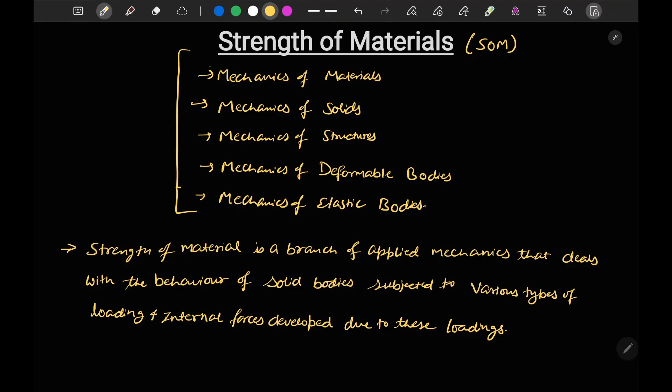Now, in the title it is also known as mechanics of deformable bodies and elastic bodies. Let's talk about deformable bodies, but before that let's first talk about rigid bodies. In case of rigid bodies, there is no change in dimensions of the body under external load. Stress may be developed, but there won't be any change in the dimension of the body for a rigid body.

Now if we talk about deformable bodies, under the application of load, the solid's dimension changes. This dimension change, this deformation, may be elastic deformation, and next it may be plastic deformation.

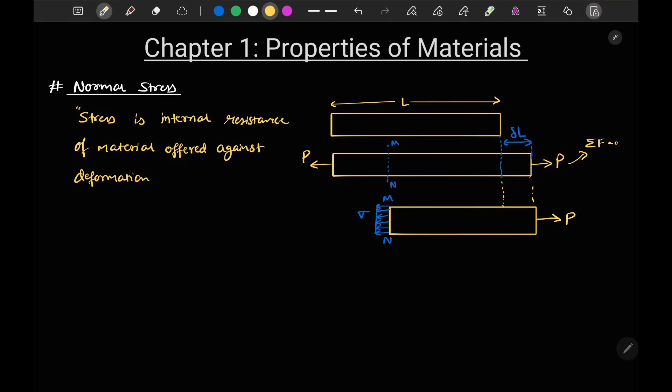Stress is internal resistance of material offered against deformation, which is force per unit area. Okay, so our stress is an internal resistance of material offered against deformation, which is force per unit area.

So stress is internal resistance. This stress will be induced only when there is presence of internal resistance. And when will this internal resistance be present? When the material is undergoing a deformation. So if there is no deformation, there won't be any internal resistance, so stress will be 0. I hope you understood this point.

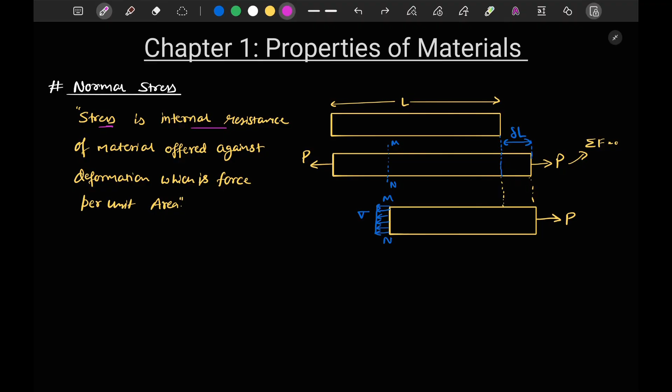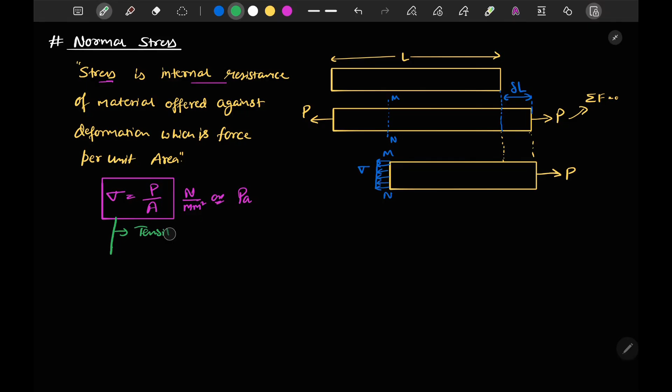This stress is force per unit area, so we can write sigma is equal to P upon A, and it has the unit of Newton per mm square or Pascal. Now this stress may be tensile or compressive. Tensile stress is represented by a positive sign, and compressive stress is denoted by a negative sign. So this is the sign convention.

I hope you know what tensile stress and compressive stress are. If you don't, let me mention it here. If a body undergoes deformation and the distance between particles increases, it is tensile. If the distance between particles decreases, it is compressive stress. Tensile stress is shown away from the cross section, and compression is shown towards the surface.

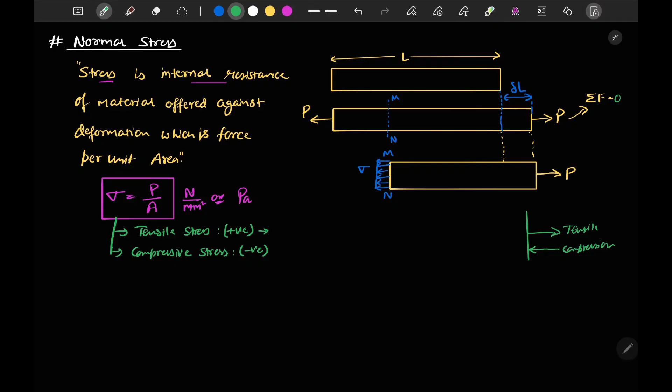And one more thing, let me mention it here. Stress will only be induced when there is a restriction in the motion. Like here, we have seen that this bar initially was restricted, so there won't be motion from the left side or right side. So if we cut it here and imagine an imaginary cross section,

if you see this part only, there is a force P. Due to force P, this material should move in the forward direction. But since this material is stationary, there must be some internal resistance or internal force acting on this material to keep it at rest. This internal resistance is called stress, that is, normal stress.

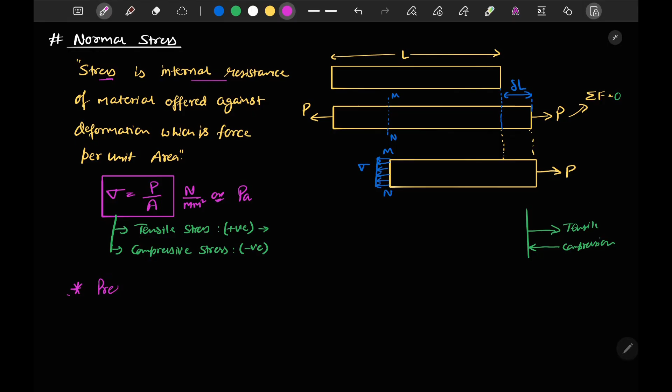Now, if we talk about pressure, let me mention a point here. Pressure has the same unit as stress, but is a different physical quantity.

And one more thing, if we have defined stress as internal resistance, then pressure is an external normal force distributed over a surface.

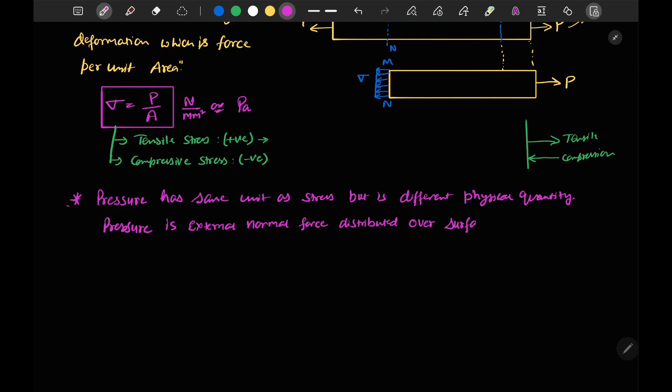So stress is the internal resistance and pressure is the external normal force. So this is the difference between stress and pressure. Now previously I mentioned that due to the presence of deformation in the body, the dimension of the body changes. So dimension changes, and the area of cross section also changes. So on the basis of the area of cross section considered during calculation, we have defined stress in two parts.

First one is engineering stress. Second one is true stress. Now this engineering stress is also known as nominal stress, and this true stress is known as actual stress. Now if I talk about the engineering stress, we can define sigma is equal to P upon A naught, and this A naught is the original cross section area of the specimen.

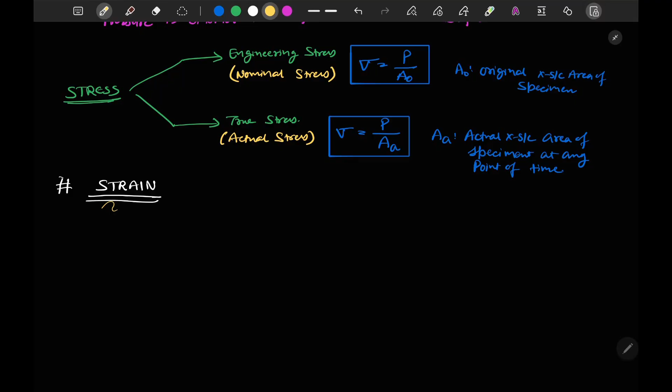Next we will be moving to the topic strain. So if we look into the definition of strain, elongation or shortening of a member under axial load per unit length is known as strain. And strain is represented by the symbol epsilon.

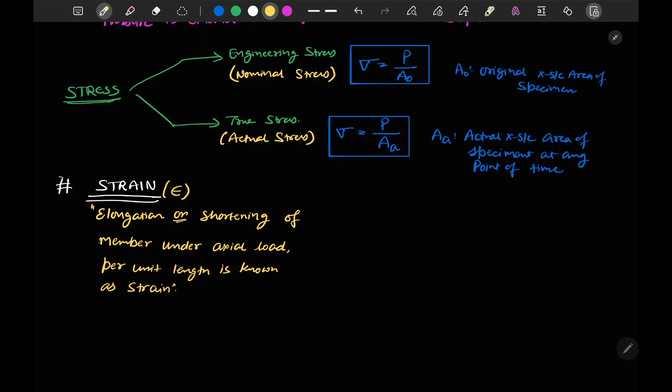So let me draw a diagram showing the strain here. Let's consider a bar attached to a rigid support. Let me copy and then paste. Under the action of external force P, the member elongates, and the elongation amount is delta L. And the original length of the member was L.

So from here we can define strain epsilon as delta L, change in length, elongation or shortening, divided by original length, that is per unit length, L. So this is our strain. Now this strain is a dimensionless quantity, because both numerator and denominator are in meters or in mm.

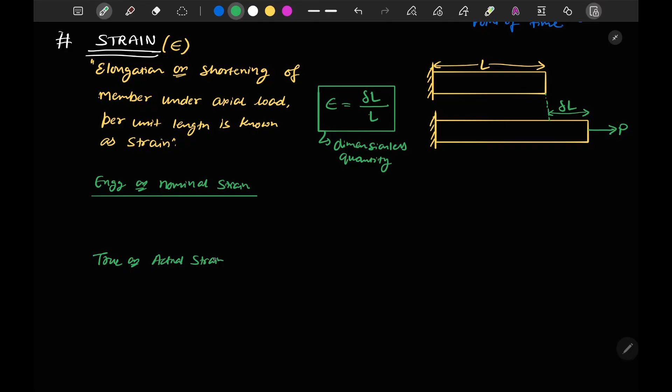Now similar to the case of stress, there can be tensile strain and compressive strain. And similarly strain is also written in the form of engineering or nominal strain, and true or actual strain. Now if I write the formula for both cases, similar to stress, engineering or nominal strain can be written as delta L upon L naught, and here L naught is the original length.

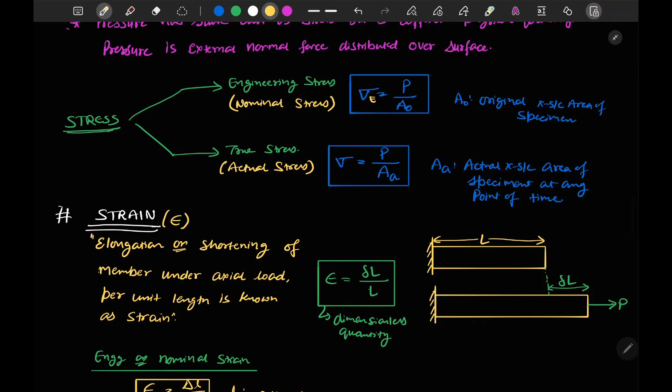If I talk about actual strain, engineering strain is written as epsilon E, and true strain is epsilon T. And similarly engineering stress is given as sigma E, and true stress is sigma T. True strain is delta L upon L_A. Now this L_A is the actual length of the member.

Now let's discuss the relationship between engineering and actual stress. We can write actual stress or true stress is equal to engineering stress or nominal stress times 1 plus or minus engineering strain. We use plus in case of tensile load and negative in case of compression.

Similarly, true strain can be written in terms of engineering strain as ln of 1 plus epsilon, and we can also write it in terms of length and area. We will see this explanation in theory of plasticity when we study production. So here let's stay with this.

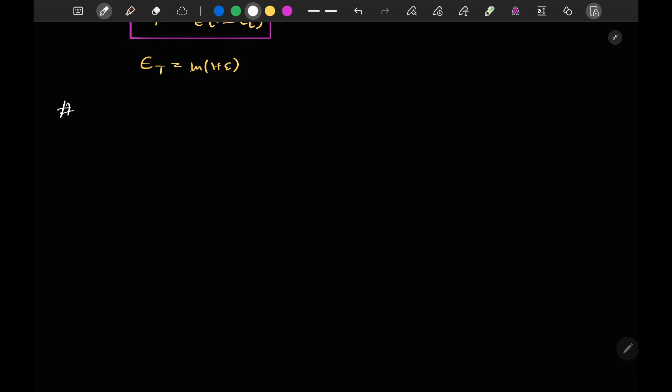So we have discussed stress and strain in strength of materials. Now we will see how different materials behave under tension test and compression test. But before discussing that, let's first discuss different types of materials, or let me write it directly as homogeneous and isotropic materials. So if we want to discuss homogeneous and isotropic material, wait a minute.

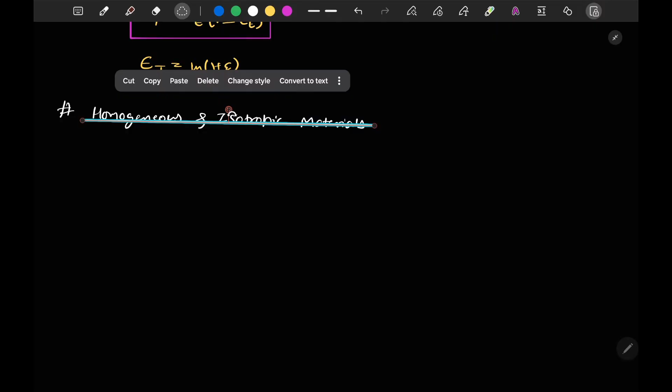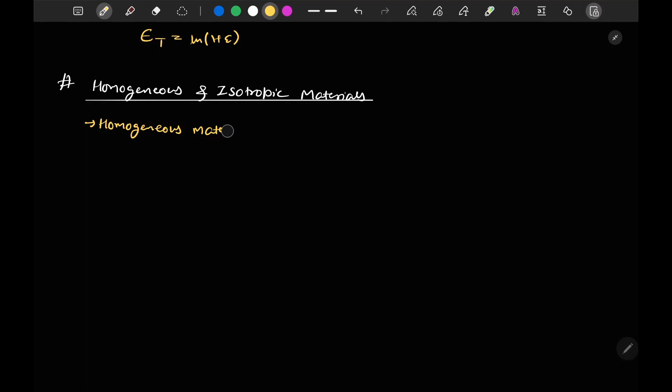So if I talk about homogeneous and isotropic material, first let me mention what is a homogeneous material. So homogeneous materials exhibit same elastic properties at any point in a given direction. Okay.

Now if we talk about isotropic, so isotropic materials exhibit same elastic property or properties in any given direction. Any direction, like it was at any point in a given direction. Here it is any direction at a given point.

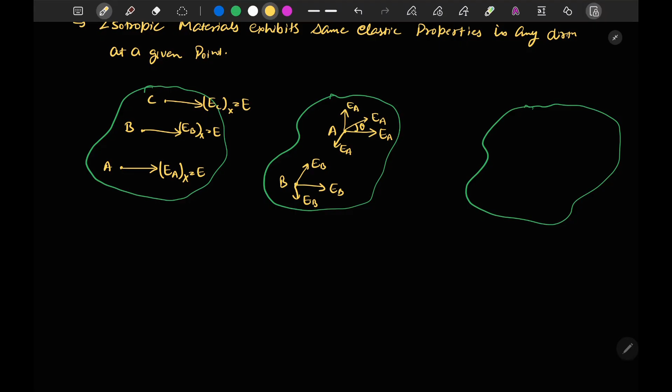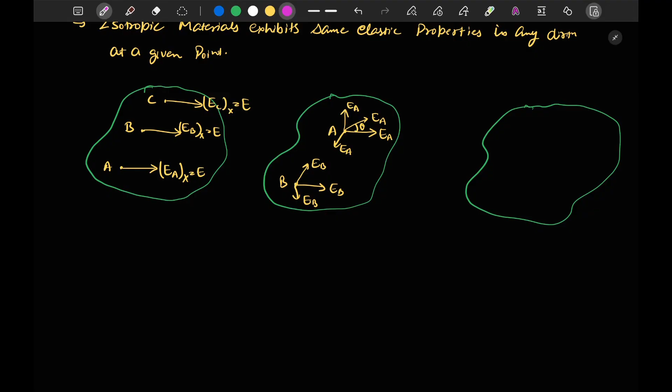So this type of material, where in a particular direction at any point we have the same value of elastic properties, is called homogeneous. And this is called isotropic. Let me mention something here. So homogeneous is any point in a given direction, and isotropic is at a given point in any direction.

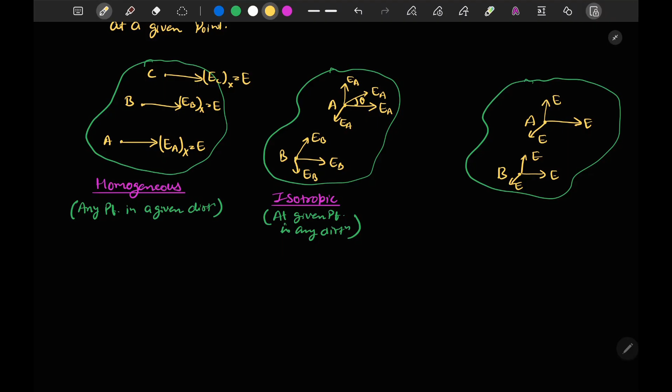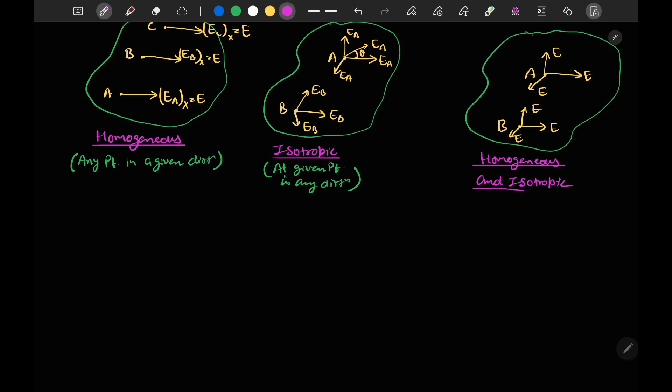Now there might be a third case where, whether it is point A or point B, your E remains the same throughout in any direction. E, similarly E. So such materials, in which the property remains the same throughout your system, are called homogeneous and isotropic.

Now we will see the stress strain diagram for mild steel under tension. So let me put the heading here: tensile stress strain diagram for mild steel. In case of mild steel under tension, what will the behavior of the material be, we will see it here. So let me plot it. Let's say this is our stress axis, and stress is our engineering stress. Similarly this is our strain axis, and the strain is also our engineering strain.

Or let's write it epsilon E. Stress and strain. So if we draw it for mild steel, mild steel is a ductile material, so generally all ductile materials follow it in a similar way. Let me draw it here. For a small part it is a straight line. And after this point there is a non-linear region, something like this.

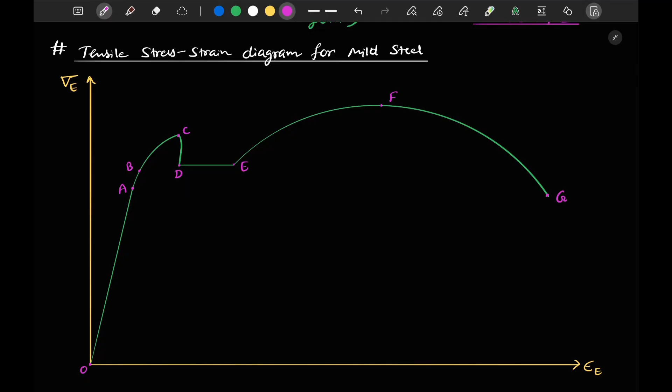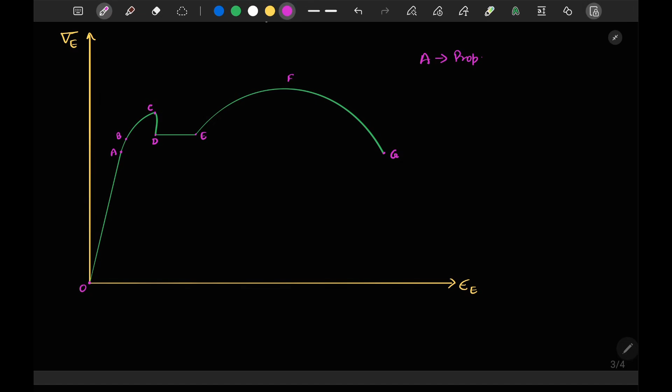Now in this stress strain curve, if I want to name the points, the point A corresponds to our proportional limit. So up to this proportional limit, it follows stress is proportional to strain. Okay, curve AB is non-linear. Only O to A is linear; A to B is non-linear.

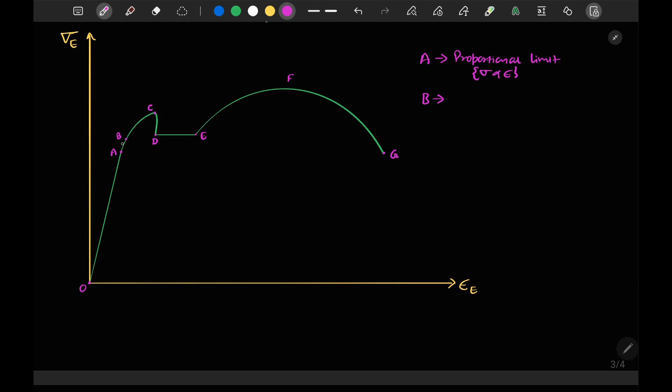So point B represents the elastic limit. Up to this elastic limit, our material will regain its original shape and size. If I talk about point C, this point C is the upper yield limit. After upper yield, the point D will represent our lower yield limit, lower yield point or yield limit.

Now let's call these the proportional point, the elastic limit, the upper yield point and the lower yield point. In terms of significance, the upper yield point doesn't have much significance in our further studies. In all future studies we refer to the lower yield point, and this lower yield point is our actual yield point.

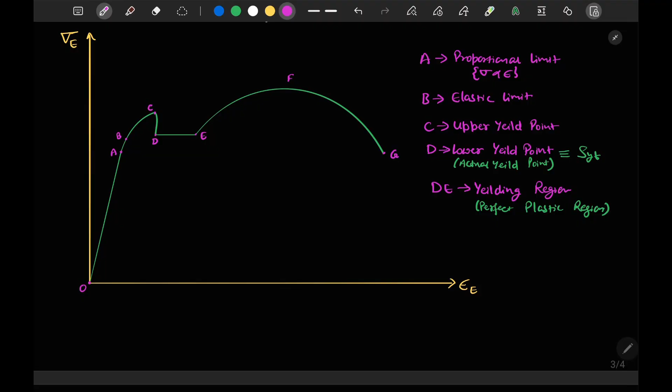Now if I talk about region EF, this is point F, our peak point here. Region EF indicates our strain hardening region. This point F is known as our ultimate point.

And the stress corresponding to this point is known as the ultimate tensile stress, SUT, also written as sigma UT. Now the next region, F to G, is known as the necking region, also called the strain softening region.

And finally point G is called our breaking point or fracture point. So this is our stress strain diagram for mild steel under tensile stress.

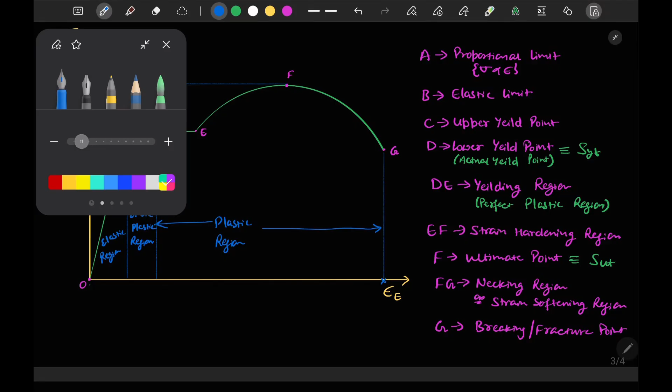So this is our proportional limit, elastic limit, lower yield point or SYT. This is our ultimate point, or SUT. So these are the main points of the tensile stress strain diagram for mild steel.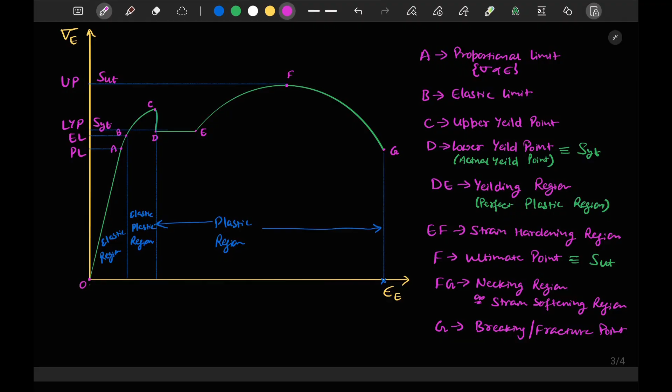Now there is one more thing. Let's say this is for our engineering stress and strain. If it was our true stress and strain, the true stress and strain curve would have gone like this. Let me draw it with another color. It follows O, A, B, C, and after C it will move something like this. Now this graph here will be known as our epsilon t and sigma t curve. I hope you understand it till here.

Now we will move to the next part, that is our compression curve. If we look into the compression curve for mild steel, let me draw the stress strain axis. This is sigma, engineering stress, and here it is strain, that is epsilon. Let's write sigma and epsilon only. If I talk about engineering stress strain, it should be like this. At some yield point it will remain constant, sigma y.

Now at this point the stress is increasing, something like this. But in case of your actual curve, the actual curve should follow something like this. So this is our actual curve and this is our engineering curve. So this is the compression curve for mild steel, MS.

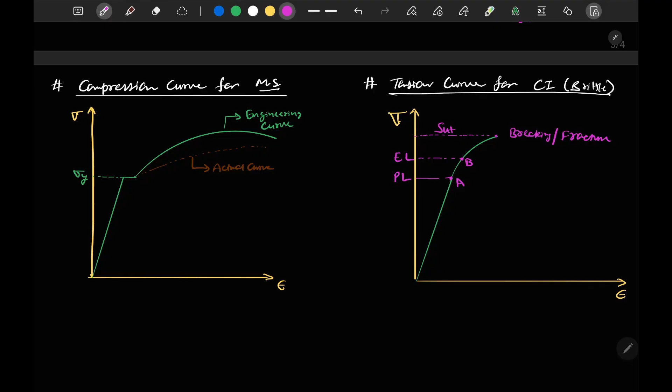Now we will move to properties of metals. The first property we are talking about is ductility. So what does ductility define? Ductility is the property by which material can be stretched. The larger the deformation, the larger the value of ductility. It is also termed as the ability of the material to be drawn into wire.

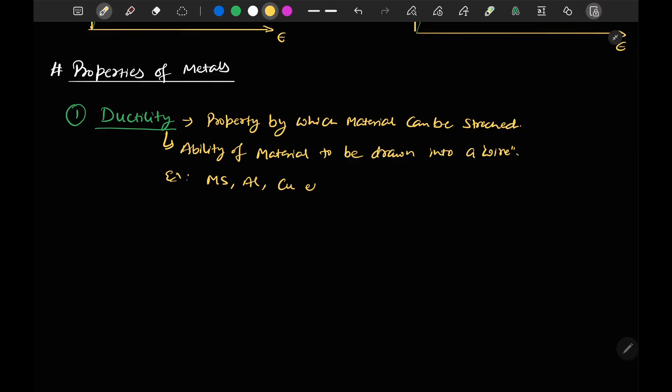So this is the ability of material to be drawn into a wire. The longer the wire that can be stretched for the given material, the higher the ductility of that material. Examples of ductile materials are mild steel, aluminum, copper, and we can also include brass and bronze. We can talk about nickel in this. These are all examples of ductile materials.

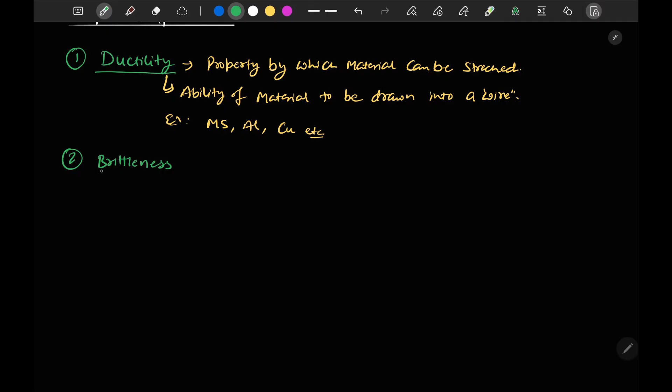The second property is brittleness. Brittleness is the lack of ductility, that is, the material cannot be stretched. The examples are cast iron, concrete and glass.

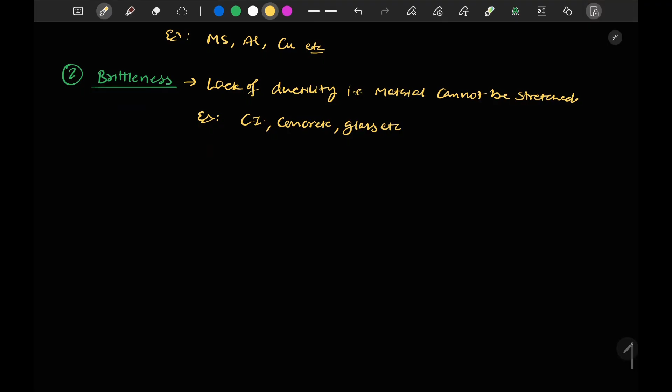Now the third property is malleability. So what is malleability? Malleability is the property of metal due to which metal can be converted into thin sheets by pressing it. A malleable material possesses a high degree of plasticity. This property of malleability is used in forging, hot rolling and stamping processes. These processes consider the malleability of the material.

The fourth property we talk about is hardness. Hardness is basically resistance to scratch or abrasion, abrasion with a single S. Of course there are some methods of measuring hardness; we will study them in your material science subject. Now the next property is creep.

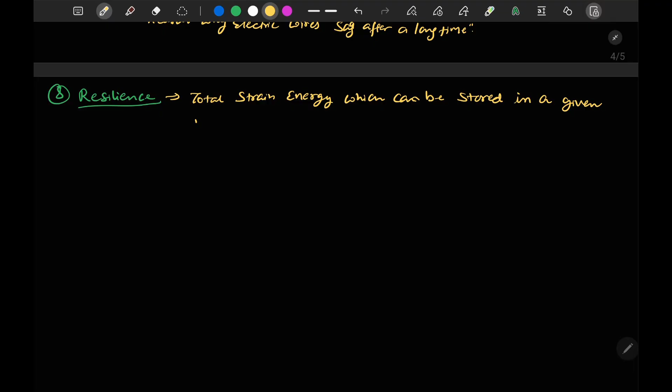Next, let's talk about 8, that is resilience. So if we talk about resilience, it is the total strain energy which can be stored in a given volume of metal and can be released after unloading.

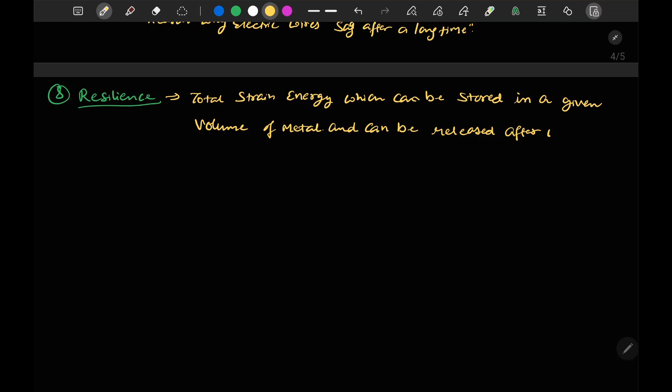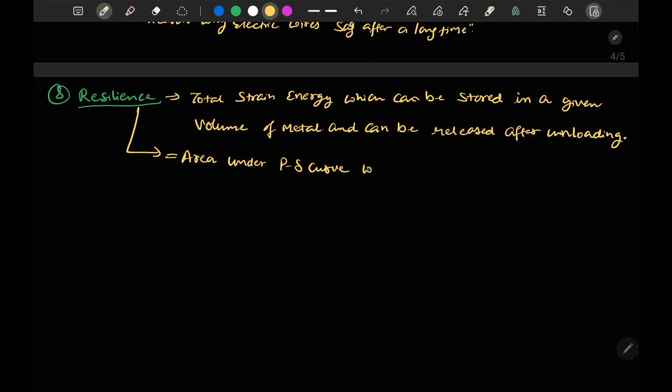This is called resilience. Okay, so this resilience is equal to the area under the load deflection curve up to within the elastic limit. Okay, within the elastic limit. Okay, now similar to resilience, we have a term modulus of resilience.

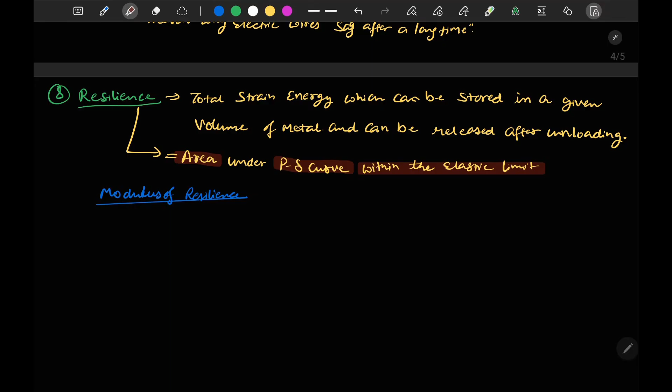So if we talk about modulus of resilience. Okay, when we talked about resilience, we talked about the area under the P delta curve within the elastic limit. Okay, now let's talk about modulus of resilience. In case of modulus of resilience, I say that it is the area under the P delta curve up to elastic limit, per unit volume.

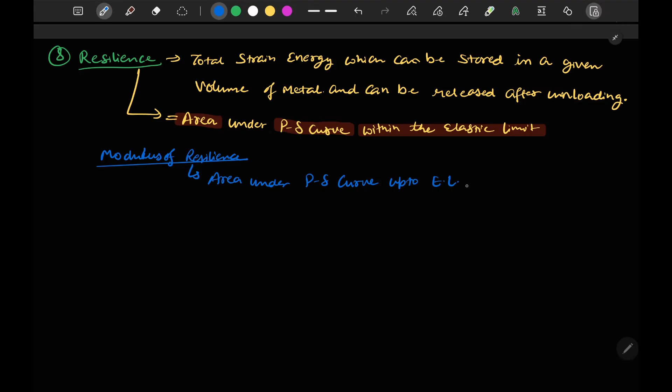And it can be also defined as maximum elastic energy per unit volume. Okay, so this is called our modulus of resilience. Okay, now this modulus of resilience is denoted by UR, and UR can be written as half times sigma y, the yield strength, into strain up to yield point.

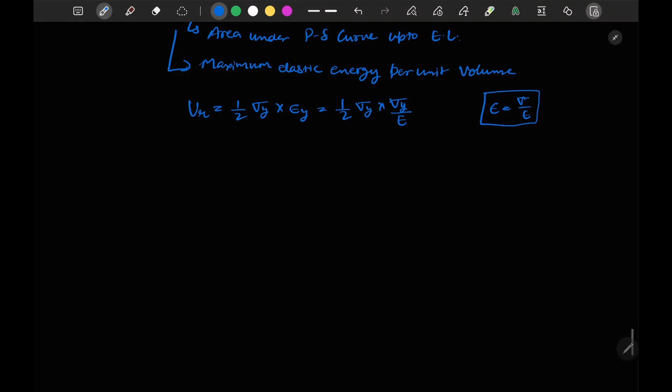Okay, and it can be also written as half into sigma y into, now this strain can be written as stress upon Young's modulus. Our epsilon y is given by sigma y by E, or we can write epsilon is equal to sigma by Young's modulus. We will see this formula in our Hooke's law, when we study Hooke's law. Okay, so from here we can say that modulus of resilience UR can be written as sigma y square by 2E.

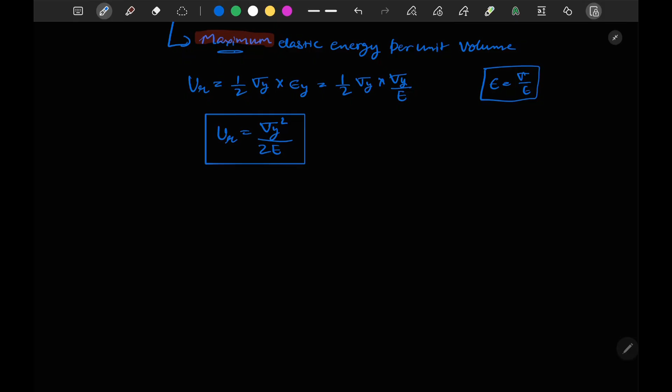Okay, so this UR, modulus of resilience, is the maximum elastic energy. Okay, so since we have said that maximum elastic energy per unit volume is the modulus of resilience, from this we can add a point: higher resilience is desirable in suspension, springs, etc.

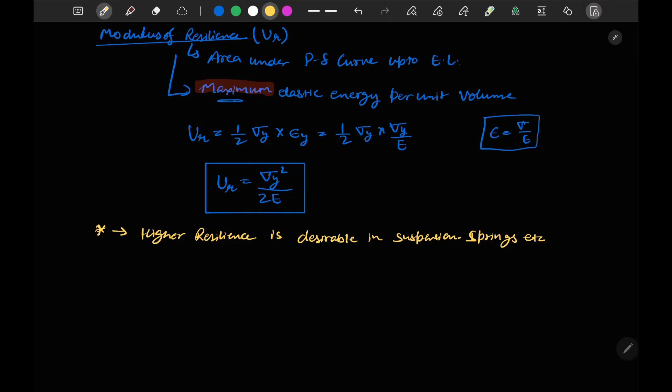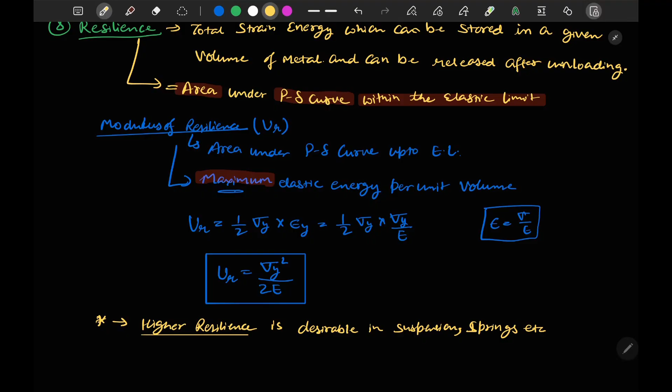Okay, so wherever shock absorption or load absorption is required, at that point we require higher resilience. Why? Because it is maximum energy per unit volume, so how much energy the material can absorb. So in those cases we require the maximum amount of energy that the material can absorb.

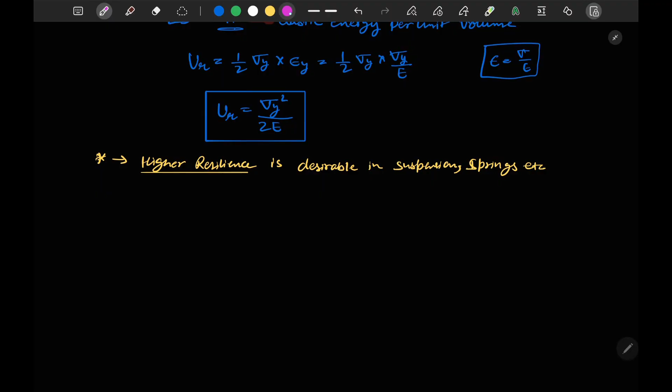Now there is one more term, that is proof stress. I have defined modulus of resilience here. Okay, now let's say I would like to define your, or I can use some other color.

Okay, so let's define proof stress. Proof stress: if I talk about proof stress, in ductile metals, like your aluminum, copper, and let's say silver, these materials do not show clear yield points. So in such metals, of course we are talking about the tension test.

Okay, so we cannot determine the value of your yield strength. So in such cases what we do, we draw an offset line with the 0.2% offset. So let me draw a stress-strain curve here. So this is our stress, this is our strain. Okay, now generally for ductile materials we get it like this. So the curve looks somewhat like this. Okay, sorry about that.

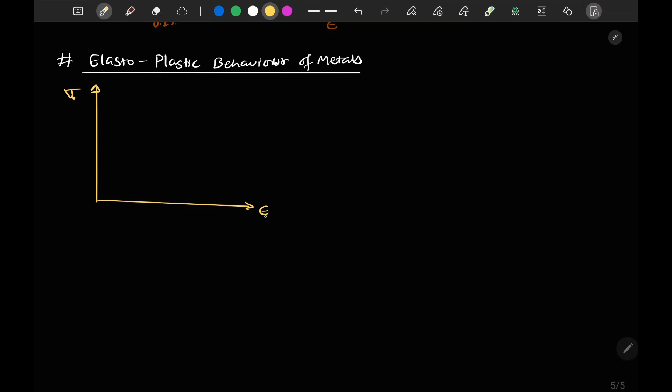Okay, so moving to the next topic, that is elastic and plastic behavior of metals, or elastoplastic behavior of metals. Okay, so let's consider a stress-strain diagram here. So let's say that this is the stress sigma, and here it is our strain epsilon. We have drawn this curve. Let's say this curve represents our loading. Okay, so this was our point O.

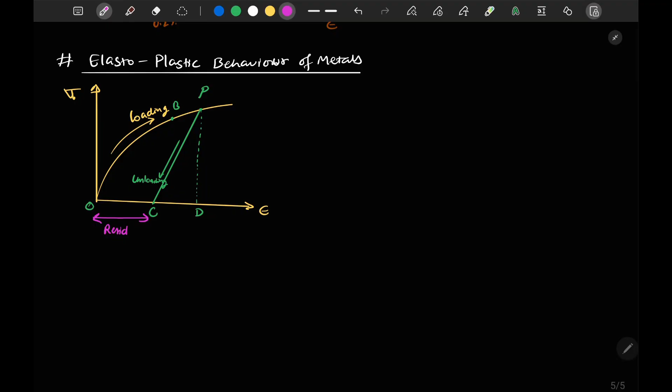Let's say that this is our point B, that is our elastic limit. And after point B, at some point, let's say P, we reach the point P and we try to unload, so this will represent our unloading. So at point P, OD is our strain, but in actuality it is only reduced to OC. So this strain is called our residual strain, and this is called our elastic recovery.

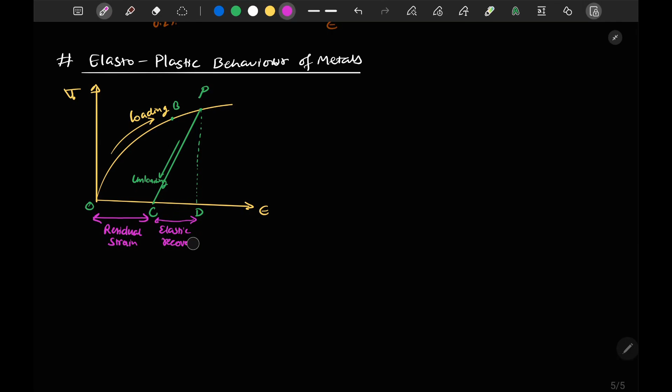Okay, now let's say that at this point we have again started to load this material. So from C to P we will move to loading. So this will again move like this. So this will be our point B, elastic region up to point B now. So from here we can say that reloading of material raises its yield stress. So if we reload the material, then the yield stress of material will increase.

So say if we go again and again beyond the elastic limit, and the material undergoes continuous cycles of loading and unloading, then the yield strength or yield limit of the material will keep on continuously increasing. So this concept is used in the case of cold working, and we will study this in production.

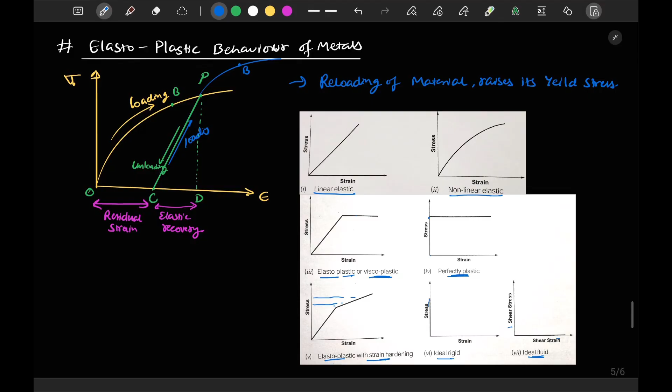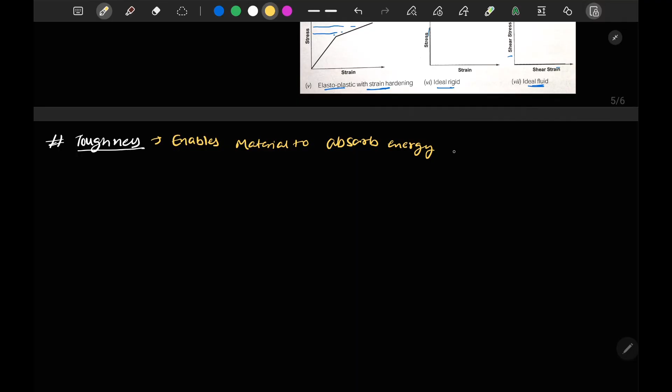So with this we have completed this topic, elastoplastic behavior of metals. Next we move to the next topic, that is toughness. So what does toughness represent? Toughness is a property which enables a material to absorb energy without fracture. So a material absorbs energy, but it does not fracture after absorbing that amount of energy, okay.

This property is desirable in conditions of cyclic loading or shock loading. If a material can absorb a large amount of strain energy before fracture, the material will have more toughness. Similar to resilience, it is the area under the P-delta curve within the plastic limit, okay.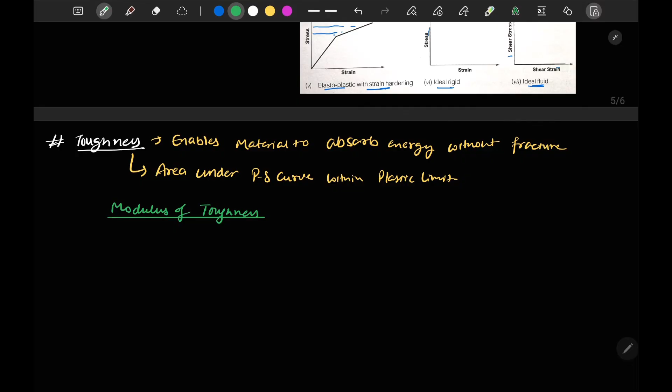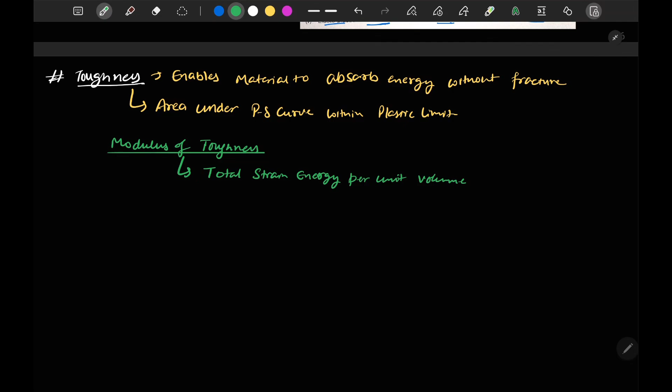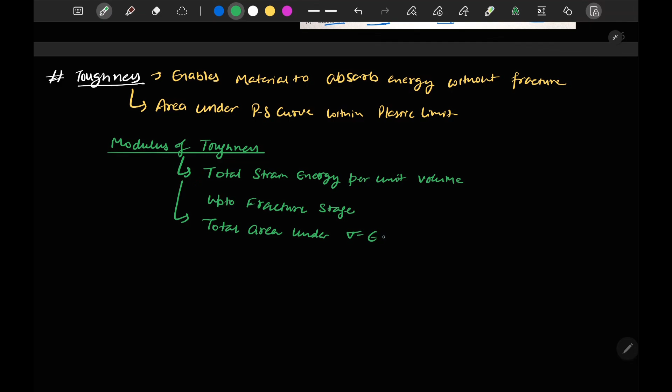Now there is a term called modulus of toughness. Modulus of toughness is defined as the total strain energy per unit volume up to the fracture stage. So this is basically the total area under the stress-strain curve.

So modulus of toughness MT is given as (sigma y plus sigma u) by 2, which is our mean or average stress, into the strain at fracture. So this is our formula for modulus of toughness. Here it is sigma yt and sigma ut, yield tensile strength and ultimate tensile strength. If we talk about compressive, then it will be in terms of C. That's why I wrote sigma y and sigma u.

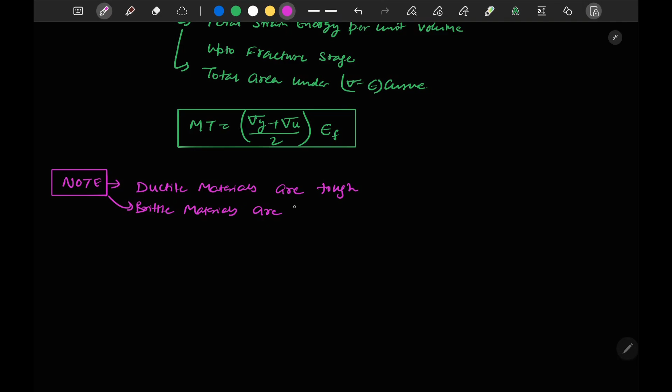So from our above study, we can write a note. This note mentions that ductile materials are tough; they can absorb more energy up to the fracture limit. And brittle materials are hard; they have more resistance to cracks on the surface and scratches. Now we will move to our last topic for this lecture, that is failure of materials.

Failure of materials. First let's talk about ductile material, and second we will talk about brittle. Ductile materials are weak in shear and brittle materials are weak in tension.

So if we see the failure of material, for ductile material in tension loading, the failure will be cup and cone fracture. If it fails under torsion, let me write it: tension, and this is torsion. If torque is applied, then it will be plane transverse fracture, and the surface will be smooth.

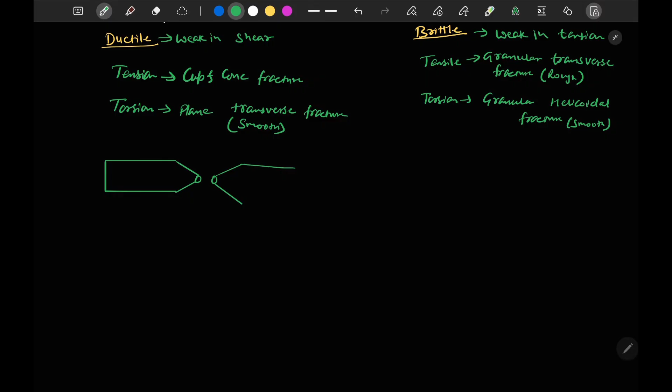Now let me draw some diagrams. In case of tension, it forms something like this. There is a P load here and P load here, so this is cup and cone. This happens at 45 degrees. This is 45 degrees, and this is our cup and cone.

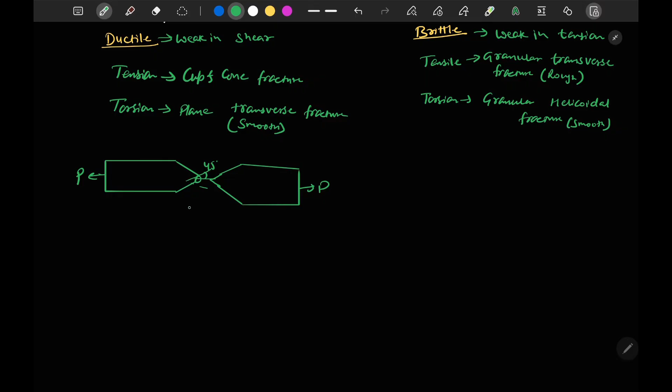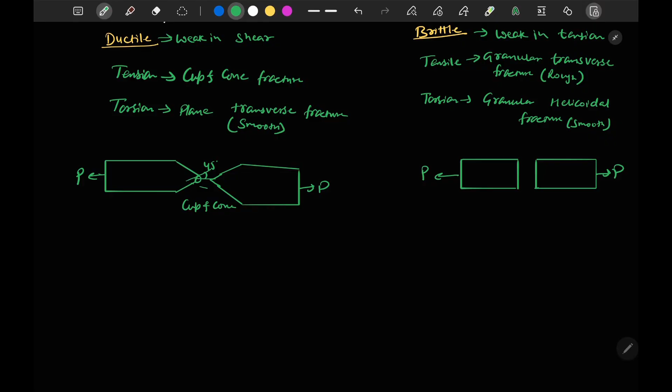Now let's talk about brittle materials. Let's say this was your specimen and the specimen was brittle, so the failure will occur like this, with load P acting. Brittle material fractures at 90 degrees. Now this is a bar; if it is under compressive load P and it is CI, it will break from here, at 45 degrees it will have failure.

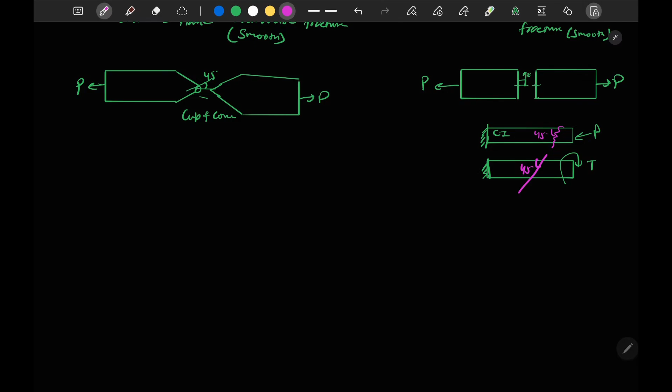Now if the same cast iron bar is subjected to torsion T, it will fracture at 45 degrees, but the surface will be smooth. So with this we are done with our first chapter, that is properties of materials. Meet you in the next lecture.